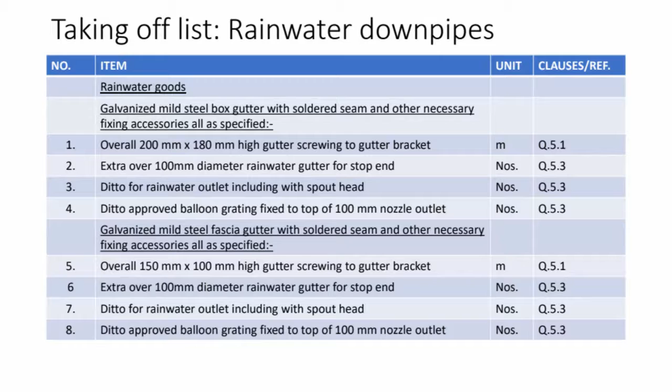Okay, this is the taking off list of the rainwater downpipe. The first one is the rainwater goods, and because we've got two types of gutter, the bottom one and the top one are the same thing, just different type.

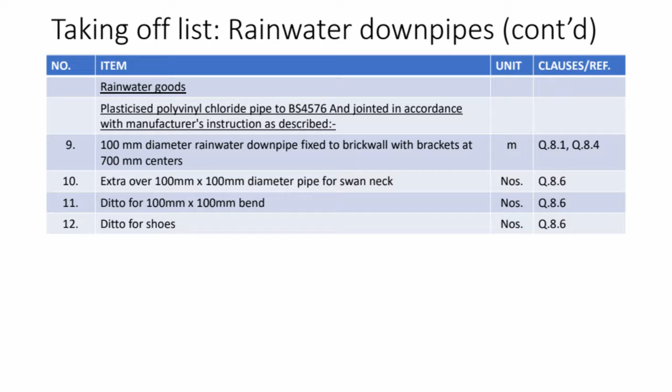This one is also the rainwater goods.

The first is the gutter. The galvanized mild steel box gutter, the soldered seam, and other necessary fixing accessories, all as specified. The overall 200 mm times 180 mm height gutter, screwed to gutter bracket.

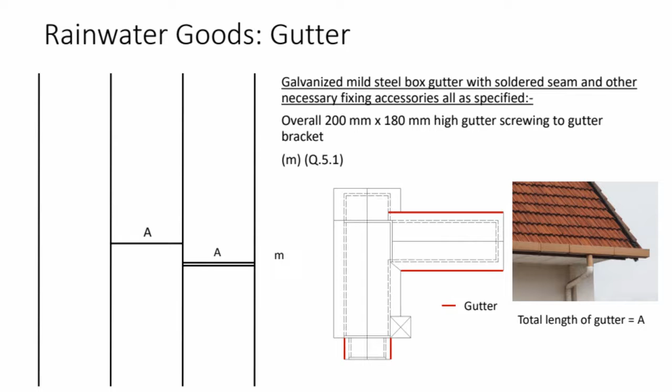The clause is Q.5.1, and we need to measure the length of the gutters and then put it inside, using the meter.

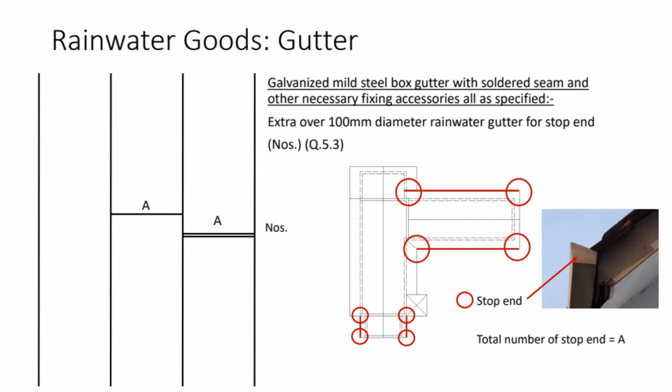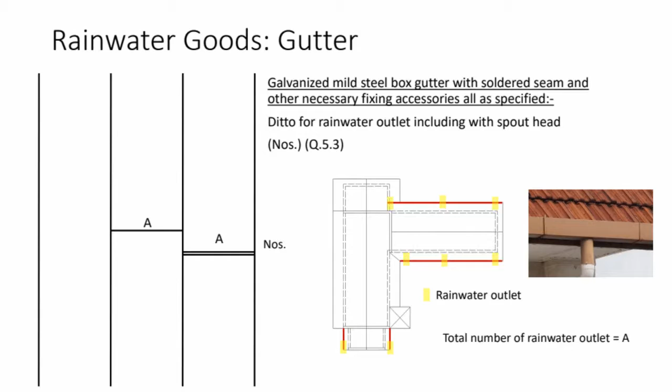Next is the ditto approved balloon grating fixed to top of 100 mm nozzle outlet, measured in number, and the clause is Q.5.3. This we can take the quantity from the rainwater outlet, because every spout gets the balloon grating, the same number.

Next is the different type. This is the second type of gutter. Overall 150 millimeter times 100 millimeters high gutter, screwed to gutter bracket, in meter. The clause is Q.5.1.

So we need to add together, then put inside.

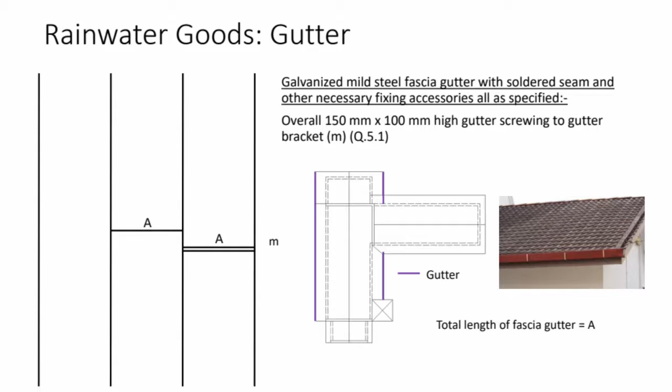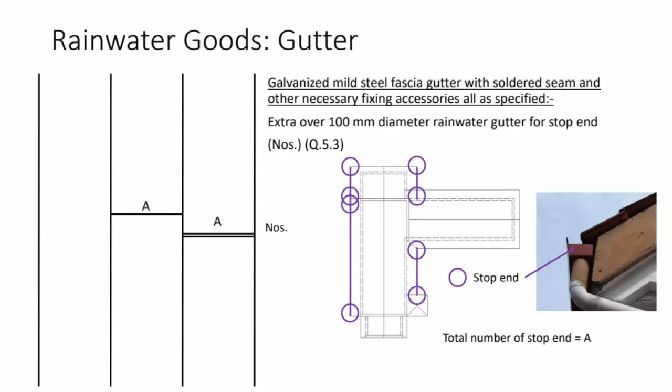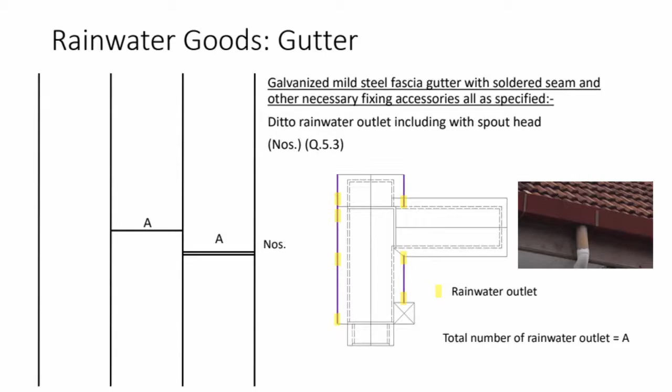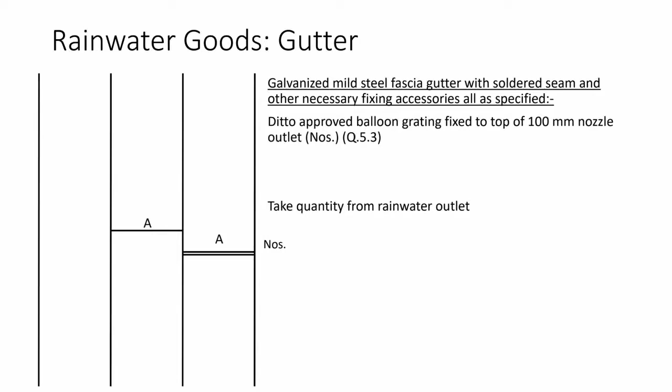Next is the second type, ditto approved balloon grating fixed to top of 100 millimeter nozzle outlet, measured in number, and also can take quantity from the rainwater outlet.

Next is the pipes, so the plasticised polyvinyl chloride pipe to BS4576 and jointed in accordance with manufacturer instruction as described. 100 millimeter diameter rainwater downpipe fixed to brick wall with bracket at 700 mm centers, then measured in meters, and the clause is Q.8.1 and Q.8.4.

And this has three types of pipes, so we divided it and then add together the total meter. The H1 and H2 are the same shape, but H2 is shorter and H1 is longer, and H3 goes straight into the ground.

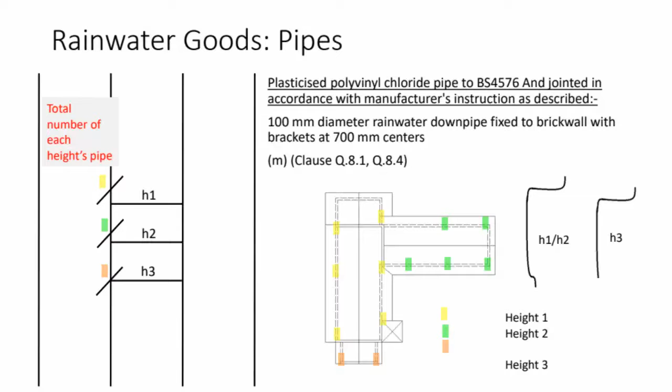Next one is the extra over 100 mm times 100 mm diameter pipes of swan neck, measured in number, and the clause is Q.8.6. We already measured where the swan neck is, and the red color with a circle is because

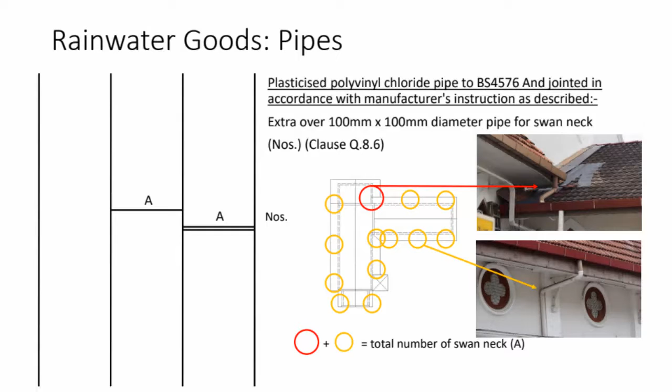the swan neck is just a swan neck only. They don't have an extension to the ground, it's just through to the gutter.

Next is the ditto of 100 times 100 mm bend, measured in number, clause is Q.8.6. So we times together, times 2, because this is the same thing but two sides.

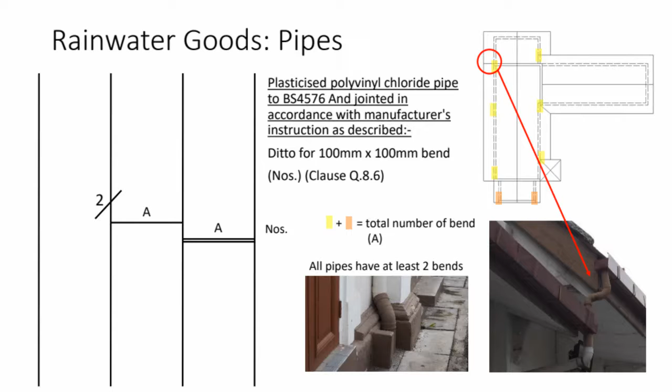Next is the ditto of shoe, measured in number, clause is Q.8.6. This one can take the quantity of rainwater downpipe and refer to the total number of rainwater downpipe, and the same number.

So we assume all the shoes are installed below the ground level.

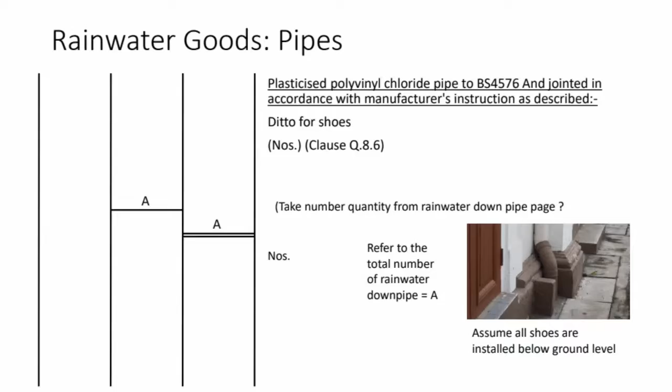I will pass to my team member Kam. So that's all my part. Thank you.

So it's me again. I will be presenting the reflection and conclusion. Conclusion will be later introduced by Qing Feng.